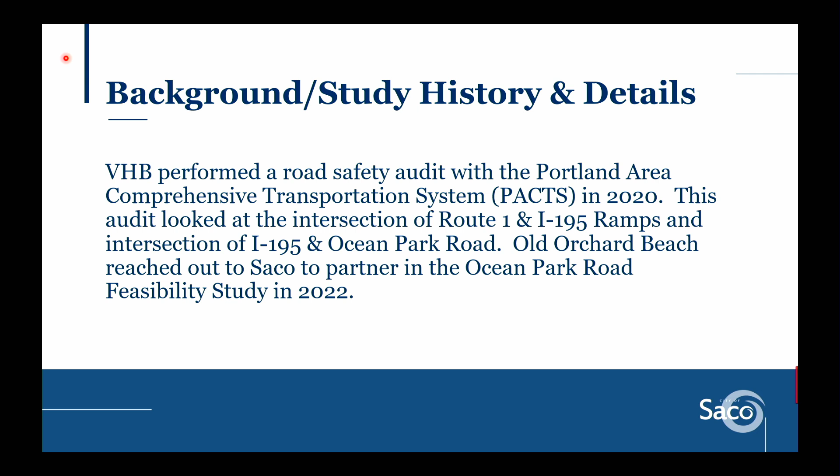The intersection of Exit 2A was identified as a high crash location by the Portland Area Comprehensive Transportation System, also known as PACTS. And that triggered a traffic study that was performed by VHB back in 2020. This audited the intersection of Exit 2A, Route 1, as well as the I-195 ramps and the I-195 Ocean Park Road. Old Orchard Beach reached out for Saco to partner with them as well as Maine DOT on the feasibility study in 2022.

So that study kicked off in September of 22. There were some initial concepts in April of 23. Traffic analysis was performed in October of 23. There were cost evaluations that were put together in the summer of 2024. There was a draft report that was released in September of 2024, and then there was a client meeting on October 7th of 2024. This was presented at the Old Orchard Beach Council meeting on November 19th, and the final report was released on November 27th of 2024.

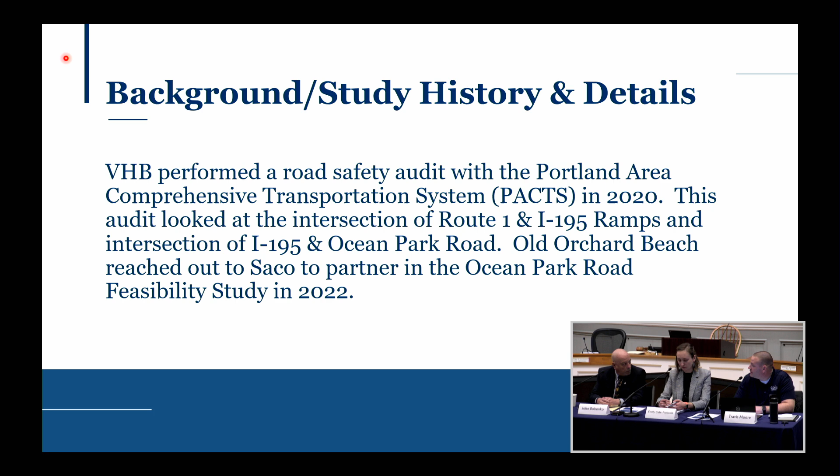And I'll hand it off to Emily. Thanks, Travis. So we just compiled what we've heard so far, and we appreciate the emails that have been sent in. So later when we ask for public comment, these are just a synopsis of some of the things that we've heard. It certainly doesn't capture everything. We'll take all your emails, all of the comments that you've submitted, and make sure those get captured and reflected accordingly, but we just want to summarize some of the things that we've seen so far.

There was discussion certainly at the January 13th City Council presentation where Gorrill Palmer presented to the City Council. There was a comment about roundabout design, eliminating or possibly reducing some carbon emissions, and to look at that. There was some interest from members of the public in learning more details about this study, so hopefully we can give you some of that this evening. There was concern about noise from I-195 needing to be addressed.

There was a question about attending the meeting and having someone attend on their behalf. So if you're in the room, you'll have an opportunity to share the comments of the person you're attending on behalf of. There were comments about Exit 2A considerations, about business considerations, and some additional need for public outreach. So we heard that, we're here tonight to talk with you folks. And then certainly safety considerations throughout the corridor.

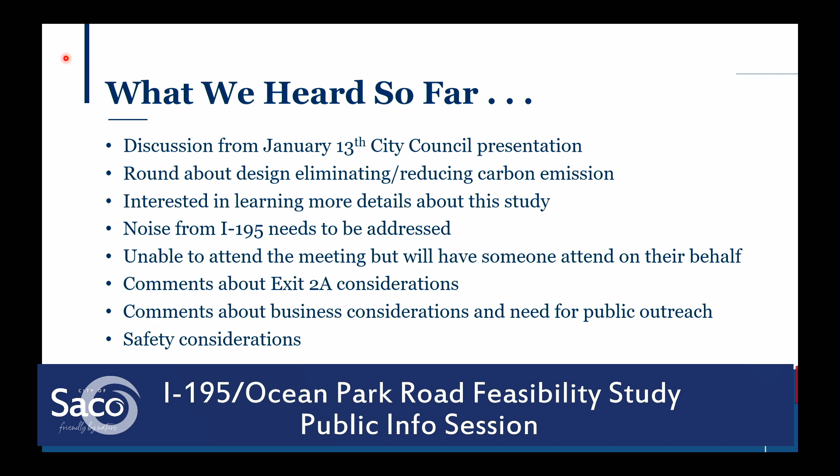And like I said, this is only a brief summary. We know we have more emails we received, some even today, so we'll make sure those get circulated and copies sent to the counselors. And for that, I'm going to go ahead and hand it off to Don Etchinger from Gorrill Palmer. He's going to go through the presentation and some study details for you.

Good evening, as mentioned, my name is Don Etchinger. You guys can hear me okay? Thumbs up in the back. Great. So here tonight, we're going to go through a presentation. We'll take questions and responses after we're through the presentation. For folks that were at the Saco Council meeting in January, the slides here will be very similar, but it's more for public content.

So first, I want to introduce our study team. This is a planning partnership initiative, a transportation study focused on transportation improvements. It's funded both at a state and local level. This project is somewhat unique because it's funded by 3 parties, 2 local parties. Our direct point of contact was the Town of Old Orchard Beach, but there was also funding from the City of Saco and Maine DOT. This slide provides our contacts for each of those client members.

In terms of the consultant team, Gorrill Palmer was the prime consultant on this project, but we were not alone. We had some sub-consultants helping out. North Star Planning assisted with land use planning and transit accommodations. James Tasse Consulting - Jim Tasse is pretty well known in the state for his bike and ped accommodations. And Acote Landscape Architects helped us out with landscaping, lighting, and also some of the renderings you'll see in tonight's presentation.

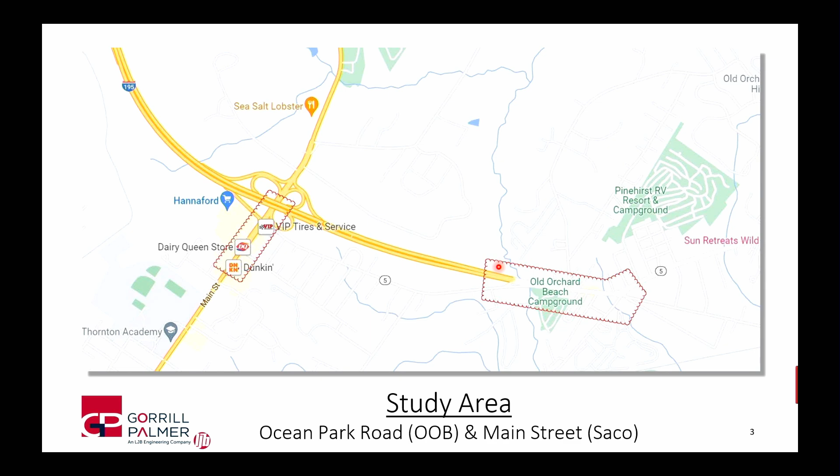This slide talks a little bit about the scope of the study - what are we looking for from a transportation perspective? One is traffic operations: how well does traffic operate through the corridor today, and can it be improved? We look at corridor safety and high crash locations, which we'll talk about tonight. Speeds were a big issue, particularly coming off the end of the spur into Old Orchard Beach, so we were looking to provide speed mitigation with this study. And then improving confusing geometry.

We had a variety of things to deal with, particularly on the end-of-spur corridor. Folks that travel through the Halfway Intersection by the 7-Eleven probably know it's quite confusing - it's a little mini roundabout, but very confusing. It's been a high crash location for years. But that's not the only issue we found through that corridor. There's also a major weave, particularly for campers coming off the spur that are turning into the Old Orchard Beach campground on the right before you get to Smith Wheel intersection, and traffic coming down Saco on Ocean Park Road that are weaving to turn left at the Smithwheel Road intersection where the Dunkin' Donuts is. So there was a major weave happening in a very short distance, also causing crashes and safety concerns.

This study was looking to address some of those issues. Access management - that is, driveway openings - reviewing those and trying to improve them for safety, not only for vehicles but also bicycles or pedestrians using that same corridor. Pedestrian and bicycle accommodations, as well as gateway opportunities entering both communities.

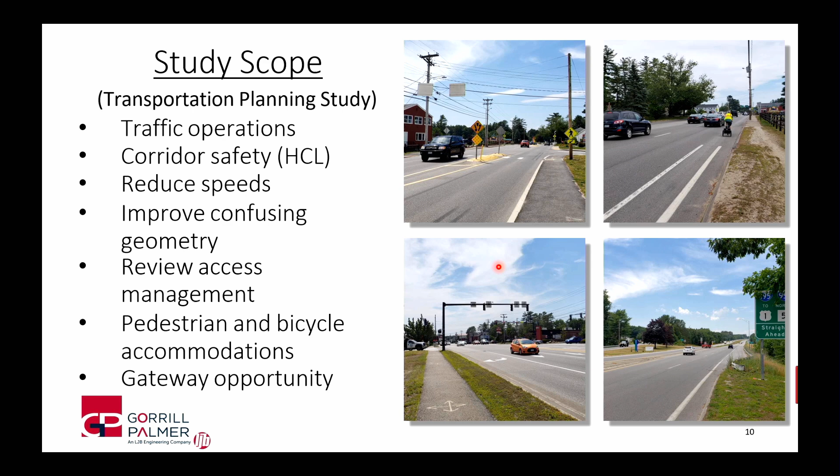Travis spoke to the slide a little bit, so I'm not going to go into great length here, but this slide provides a summary of our schedule. This project has been ongoing for the better part of 2 years. We had a kickoff meeting in the fall of 2022. We spent the bulk of 2023 into 2024 looking at traffic operations and safety improvements, and presented those in early 2024. From there, we had a series of options to consider, which we'll talk about tonight. We compared those options, came up with cost estimates and recommendations in the summer of last year, and presented our draft report and recommendations last fall.

After presenting the draft report to the Old Orchard Beach Council in November, we wrapped up this report in late November of last year. I would say over the course of the 2 years, this will be our 24th meeting on this project. 5 have been public or council related, and the rest have been study team meetings involving all 3 clients: Town of Old Orchard, Saco, and Maine DOT.

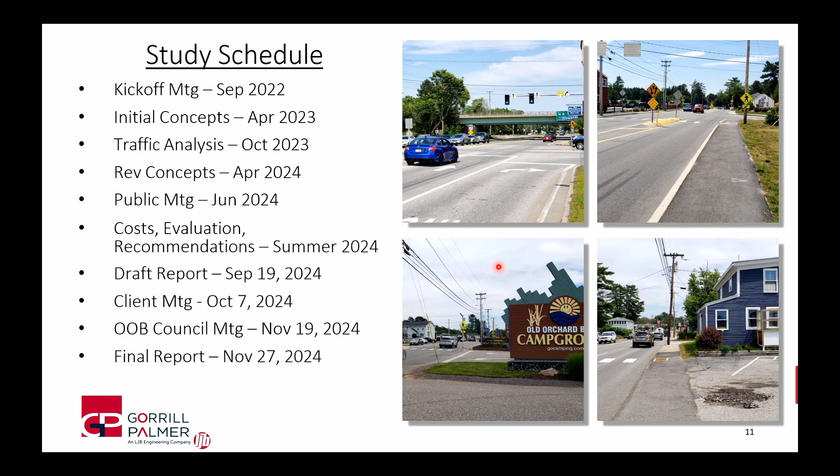So let's talk about the definition, what defines a high crash location. It's 8 or more crashes in a 3-year period and an intersection or roadway section that has a critical rate factor greater than 1.0. What is that? It's a mathematical calculation that Maine DOT goes through, comparing the types and severity of the accidents at this location to accidents across the state. So in order to be classified by Maine DOT as a high crash location, you need 8 or more crashes in a 3-year period and a CRF greater than 1.

Both off-ramps, exit 2A and 2B, in the eastbound direction where they merge with Route 1 are high crash locations. Traveling down into Old Orchard Beach, the halfway intersection that we mentioned earlier is also a high crash location, which I'm sure folks are not too surprised with. I think we have some diagrams of each of those.

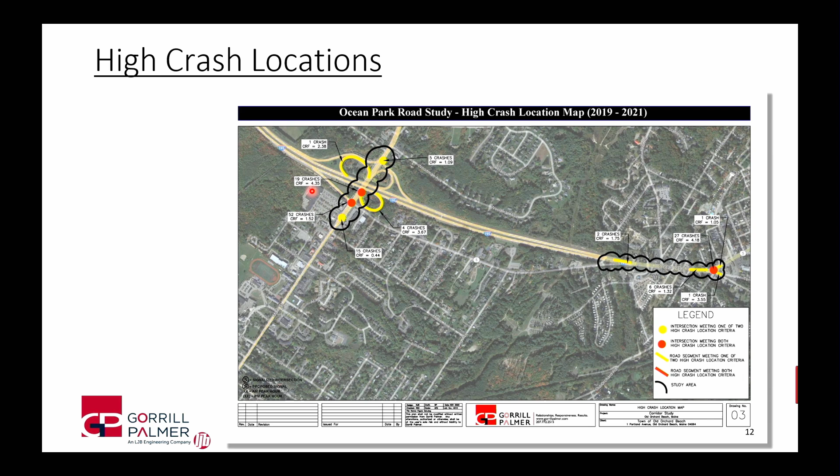So this intersection here, this is our crash diagram. The study period we looked at was when we started our study, so the trailing 3 years was 2019 through 2021, kind of during the COVID years. This is the exit 2A off-ramp where my cursor is. Across from it is Ocean Park Road. Where my cursor is now is Route 1 heading in the northbound direction, and Route 1 in the southbound direction. Hannaford is over where my cursor is now, and the VIP is on the opposite side.

So this intersection over the 3-year period from 2019 through 2021 had 52 crashes and a critical rate factor of 1.52. If you look at the crash patterns, you'll see that a lot of the crashes are reflective of the through traffic coming off the off-ramp from exit 2A onto Ocean Park Road. That movement happens at the same time as traffic coming up Ocean Park Road turning left, so they're concurrent movements. The folks coming up Ocean Park Road are supposed to yield to the traffic coming on the off-ramp. Unfortunately, there are a lot of accidents with that maneuver.

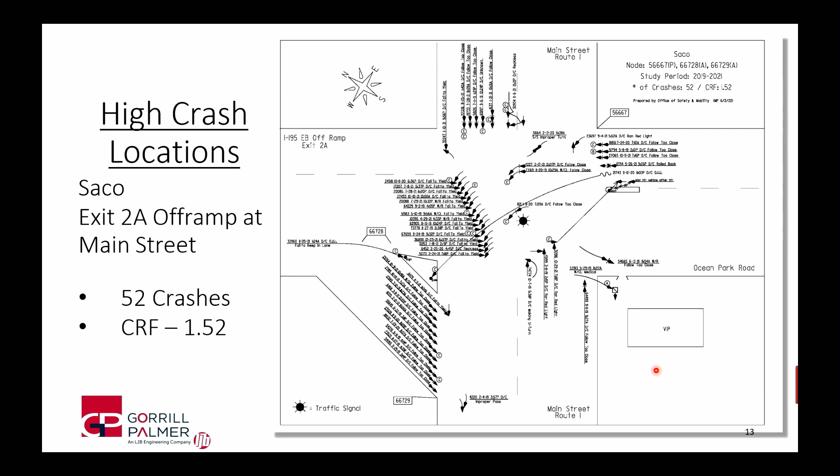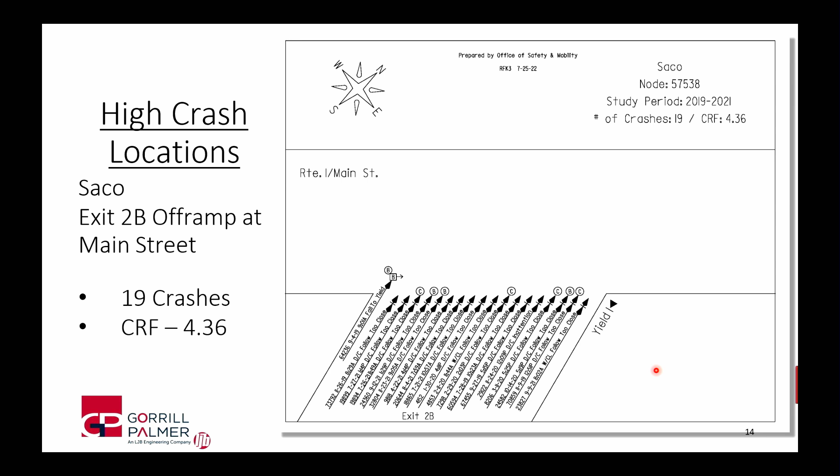The next intersection is the second off-ramp on Route 1 in Saco. This is the northbound off-ramp heading towards Funtown, Splashtown, coming from the Turnpike. It has 19 crashes in that same 3-year period and a critical rate factor of 4.36. A lot of these accidents are attributed to lack of sight lines, high speeds, and failure to yield to traffic on Route 1.

This is the third crash diagram, down in the town of Old Orchard Beach at the halfway intersection. To give folks their bearing, the 7-Eleven is over here, Ocean Park Road is on the opposite side, and then we have Old Orchard Road, Saco Ave, and Temple Ave. This intersection has 27 crashes and a critical rate factor of 4.18. So all 3 intersections qualify by Maine DOT as a high crash location.

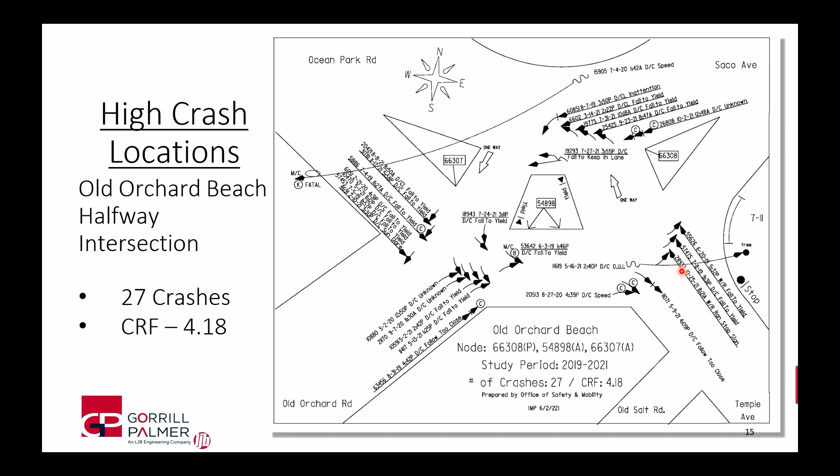So all 3 intersections were part of this study to look at mitigation measures to improve those. As Travis had mentioned in his opening slides, we actually didn't realize until we started the study that there was a prior safety audit done for the 2 off-ramps in Saco back in 2020, done by VHB, another consulting firm, where they looked at those high crash locations. They were identified as high crash locations, so they did a safety audit and came up with their own recommendations. We've carried those recommendations forward into this study.

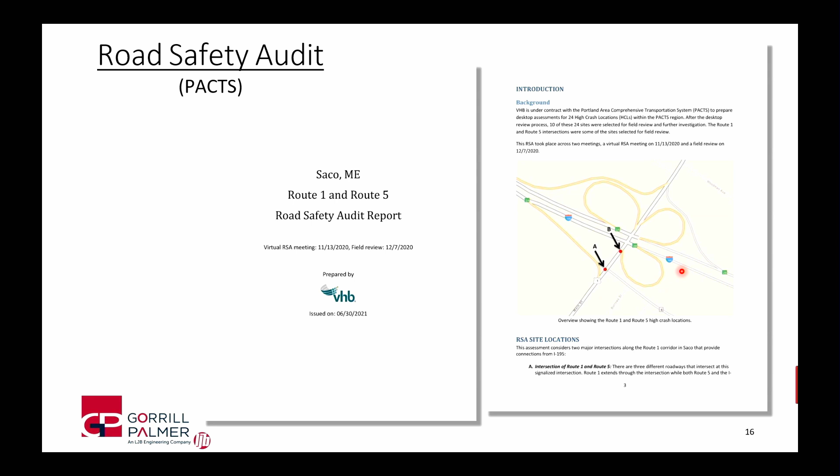The recommendations include closing the through movement of the exit 2A off-ramp that currently accesses Ocean Park Road, and not allowing that movement to happen. Instead, traffic would be sent down 195 to the far end of Ocean Park Road, which currently lacks full access—you can't turn right into it, nor turn left out of it onto the spur. We'll work in improvements so we can provide full access on the eastern end of Ocean Park Road in Saco.

Doing so allows us to close the southbound exit ramp at 2A through movement. That's the recommendation from the report presented to us, which we were asked to carry forward into this study.

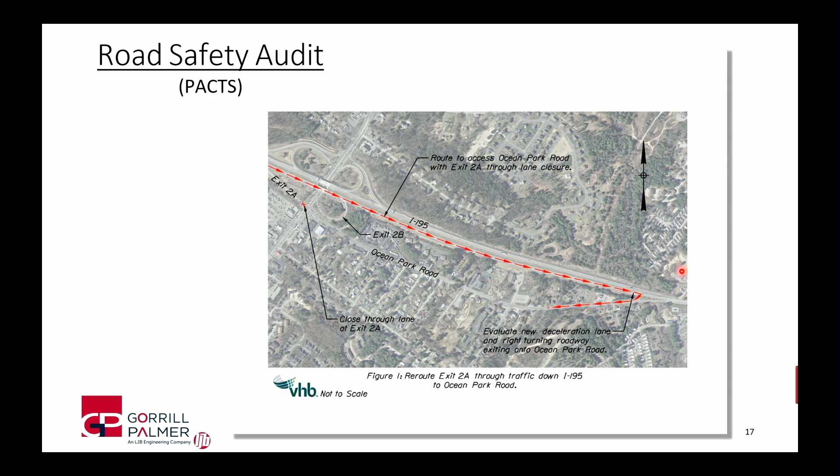So the next few slides will present the recommendations from this planning study, with graphics showing what was comprised in the report. We'll talk about concepts, costs, the evaluation matrix, and our final recommendations.

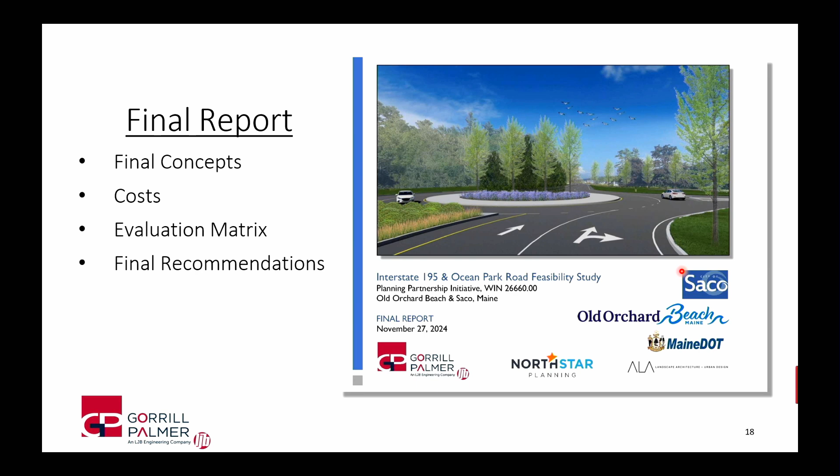As part of our recommendations, we're proposing to eliminate that through movement, which will eliminate the conflict between traffic coming off the off-ramp and traffic on Ocean Park Road trying to turn left. This should improve the safety and operations of that signalized intersection.

We're making the corner tie-in a little more abrupt and providing improvements to sight lines, along with clearing in that area so sight lines improve as you come off the off-ramp. The geometry will force drivers to slow down before merging with Route 1 traffic.

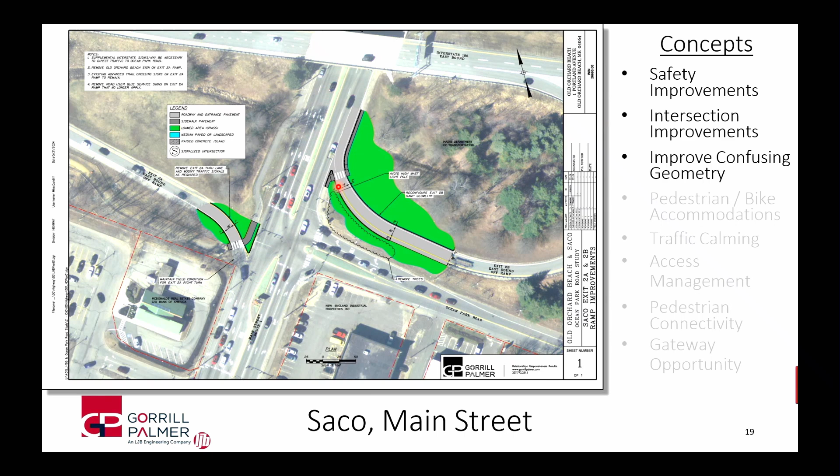The remainder of the slides discuss Interstate 195 as it transitions from an interstate to a more urban street in Old Orchard Beach. For folks driving the spur, as you come down it tapers from 2 lanes to 1 lane before merging into the urban environment and into Ocean Park Road from Saco.

We've found, based on input from the public and town officials, that speeds are still a problem even though it tapers from 2 lanes to 1 lane. Traffic is not slowing down coming into this urban area.

So a few recommendations are being made in this study. The first is to move the merge from 2 lanes to 1 lane further back, further to the west, by about 1,000 feet, tapering traffic sooner.

Basically, once drivers go over the interstate, which crosses over Main Street, Route 1, there's a long downhill slope. We're going to taper from 2 lanes to 1 about 1,000 feet sooner than today—about 3 football fields in length.

We're also going to introduce a roadway chicane—the technical term—basically some horizontal geometry to force vehicles to slow down before they approach the first intersection. This roadway chicane would be incorporated with any of the options studied for that first intersection.

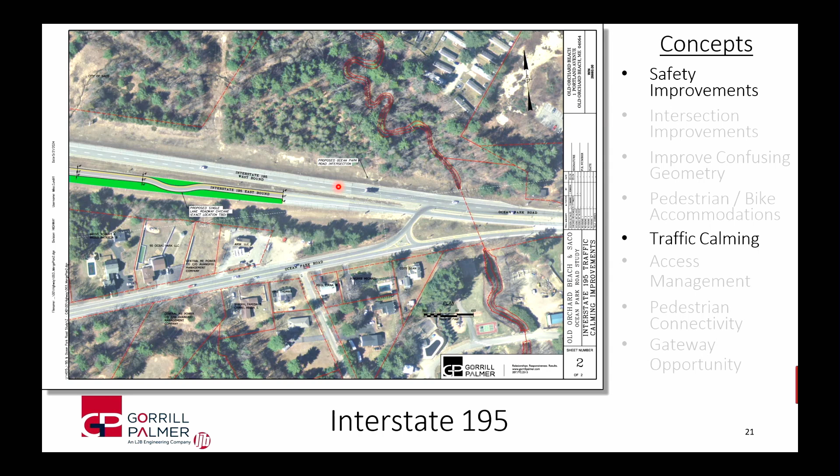The first intersection is the one coming off the spur. We looked at 3 different options there. Today it's an unsignalized intersection without full access, so some right turns and left turns are prohibited.

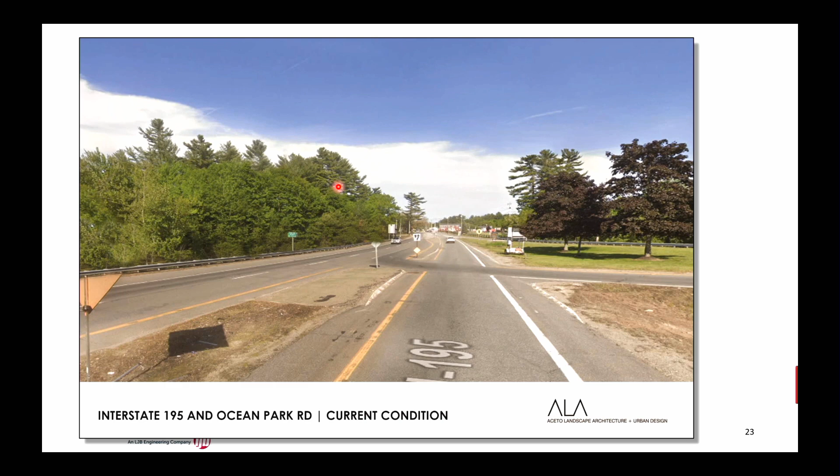So there's a lot going on in this corridor. Currently, the Smithwheel Road intersection is unsignalized. During the summertime, it's pretty challenging to get in and out of there because of the volume of traffic. And I had mentioned that the campground entrance was somewhat challenging too because it's very close to the end of the spur.

And so campers coming off the spur have to shift 1 or 2 lanes to get access to that campground. So a couple of things are being proposed here. One is we're proposing to signalize the Smithwheel Road intersection, which will improve the operations during the summertime for the side roads. The second thing we're proposing is to relocate that campground entrance, currently opposite Dunkin' Donuts, to be opposite Smithwheel.

So we'll create a four-way signalized intersection there. This provides more distance for that weave I mentioned, coming off the spur for traffic to get into their right lanes. The signal will provide better access in and out of Smithwheel and for the residents in that area.

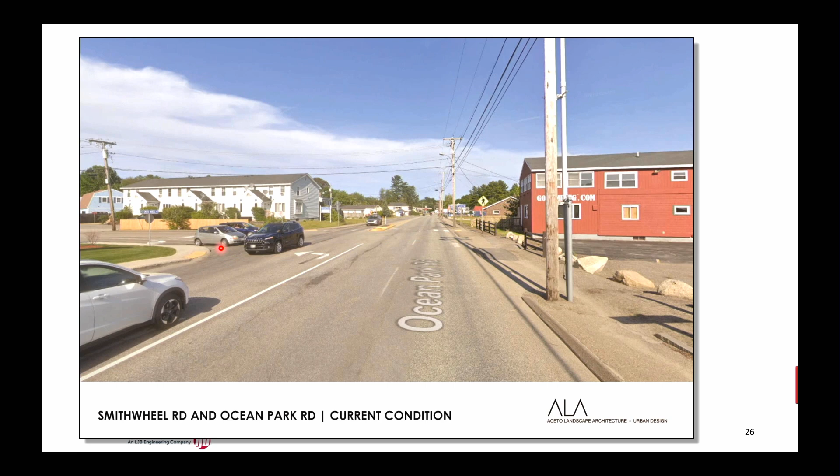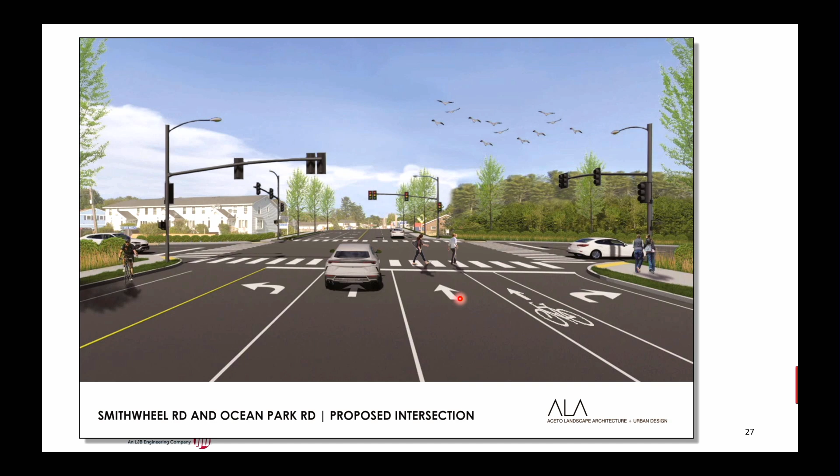All right, this is our third intersection - the halfway intersection where the 7-Eleven is located. We'd actually done a prior study, a planning partnership study with just the town of Old Orchard Beach 3, 4, or 5 years ago, that looked at just this intersection because it was a high crash location. We analyzed 5 or 6 different options.

We narrowed it down to either a roundabout or a signalized intersection, and carried those recommendations forward into this study. The conclusion of that prior study was that we really needed to look at the whole corridor, not just that intersection - that's why this second study came about. The recommendation out of this study is to signalize that intersection. We feel we'll have slightly less property impacts, and the operations of the corridor will be better with back-to-back signals at Smithwheel Road.

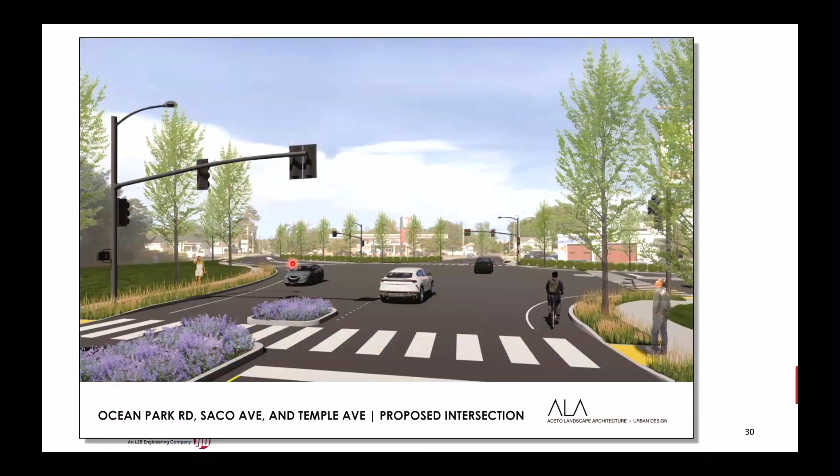All right, I'm going to jump back. We're going to talk briefly about Dewey Ave. This is a local street near that halfway intersection, located right here. I'll go back a couple of slides to show - Dewey Ave is located here. It's a dead-end street, servicing about 8 residential properties.

And with the proposal at this intersection, we're proposing a center median there, so we're restricting left turn access in and out of that dead-end street. So working with town officials, it was important that this study looked at some alternatives to access there, potentially providing secondary access, since we are restricting it with the intersection work.

So we looked at 4 different options for how to provide better connectivity to Dewey Ave. This was one of the 4 we came up with, where, shown in gray here, we're providing some secondary access through some of the other streets - Jeanette Ave, Oak Street. So basically we can provide a local street connection so that people can access Dewey Ave from other streets, just not from Ocean Park Road.

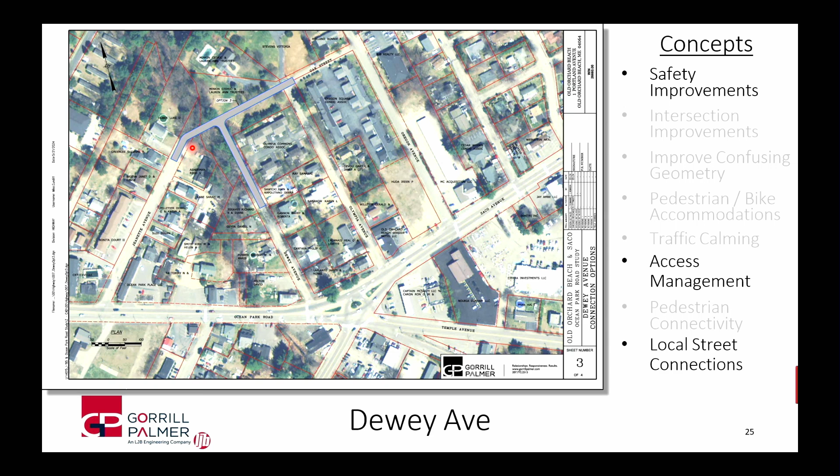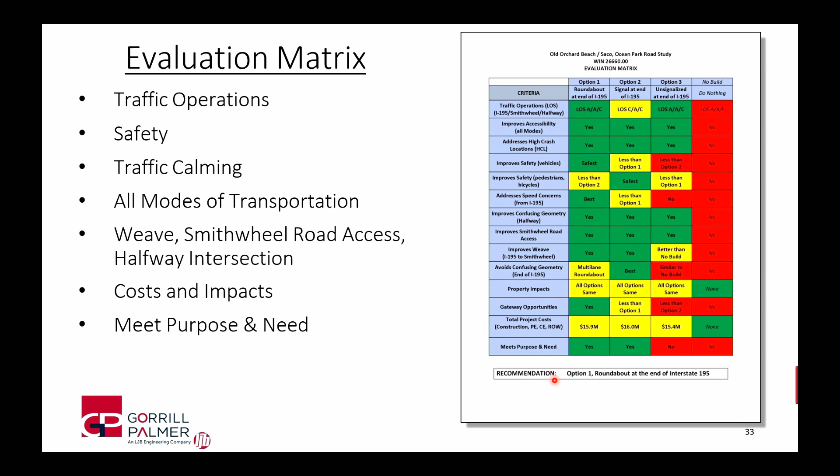This might be my last slide, so our final recommendations: we're recommending a roundabout at the end of the spur, a signalized intersection at the Smithwheel Road intersection, and a signalized intersection at the halfway intersection. We're also recommending geometric improvements at the two off-ramps in Saco on Main Street.

In the report, there's a whole page of additional comments, like making sure we design certain movements for certain size turning vehicles if it goes to a design phase. The state traffic engineer specifically asked about the roundabout design—when exiting Old Orchard Beach, could we have a dedicated lane separated from the roundabout by a median, so traffic doesn't have to engage with traffic in the roundabout. There will be some modifications to the recommendations in this report, but generally speaking it was supported through the process.

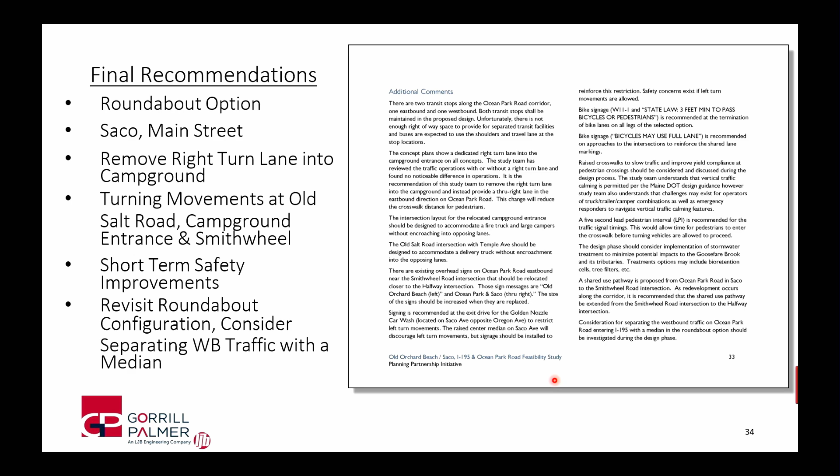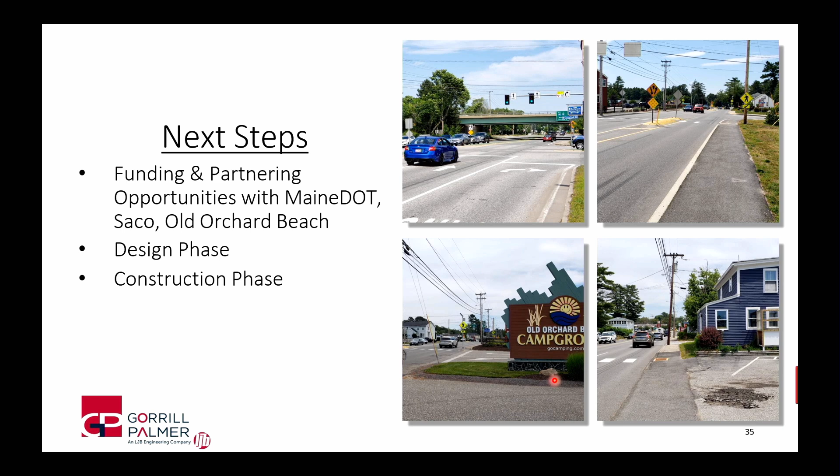In terms of next steps, where we are today is more information presenting, but if there's desire and interest, the next steps would be partnering with both communities and DOT, looking at funding opportunities, and how best to proceed forward with the project. Probably the next phase would be a design phase, then a construction phase. Design phase could take 2 to 3 years depending on funding, and construction, best guess, is probably a couple of years as well.

Thank you, Don. I want to point out that these studies take multiple years down the road from when the study is complete to what gets implemented on the ground, with additional time for public comment and design phase. We couldn't build something just on this study; it would have to go through a whole other engineering design phase. With that, I'd like to hand it off to Maine DOT.

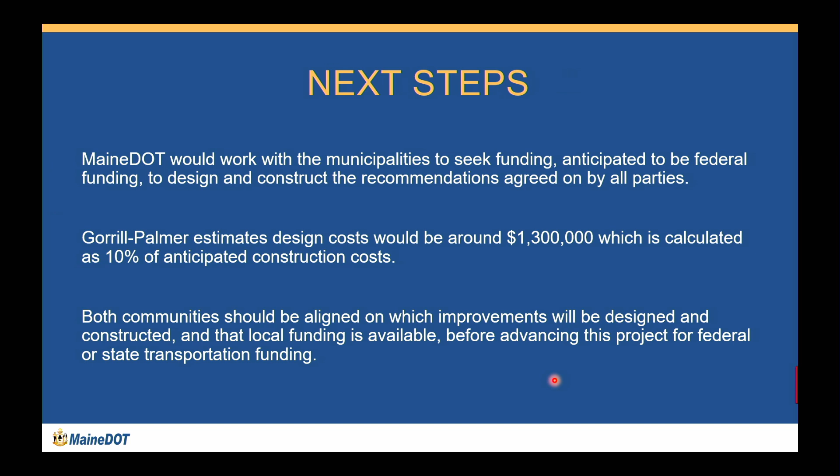Gorrill Palmer estimates design costs would be somewhere around $1.3 million or so, which is calculated as 10% of the anticipated construction costs for this project. And both communities should be aligned on which improvements would be designed and constructed, and that local funding is available before advancing this project for federal or state transportation funding.

So what I want to just make note of is that this is still in the study phase. This matter was presented to the City Council about a month ago, and out of that discussion came the request for this input session. It's important to understand the City Council has not signed on to any resolution yet. It's still evaluating its options. So tonight, it's important for us to understand and the City Council to understand what concerns you have.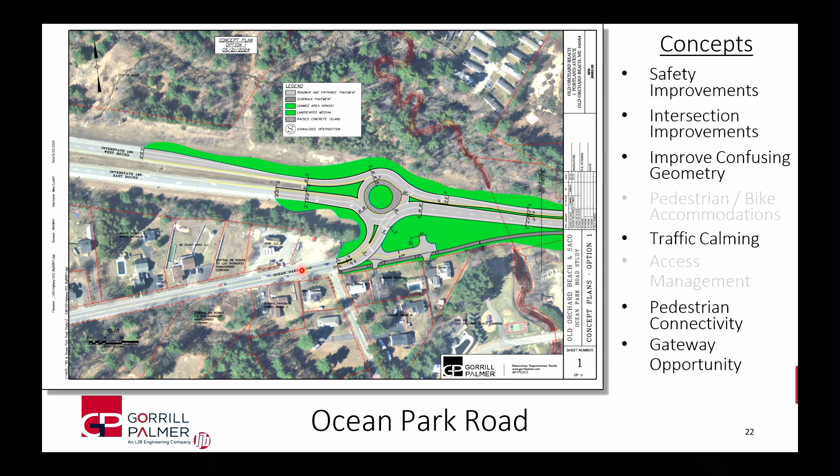All right, so this graphic here, you'll see this is the intersection where we're proposing the multi-use path coming back towards Saco. And then it continues along the old road alignment all the way here to where it ties into Ocean Park Road. Ocean Park Road has 8-foot paved shoulders, so we're kind of dropping it into that. There could be a future opportunity to continue that pathway all the way up to Main Street Route 1 if there was a desire, and that can connect you to the Eastern Trail.

In the opposite direction, our study recommendations include, as land gets redeveloped heading eastbound towards Old Orchard downtown, that this multi-use path, as these parcels get redeveloped, there's enough setback to allow that multi-use path to continue in that eastbound direction as well. So people from the campground trying to get towards the beach have that 10-foot wide trail.

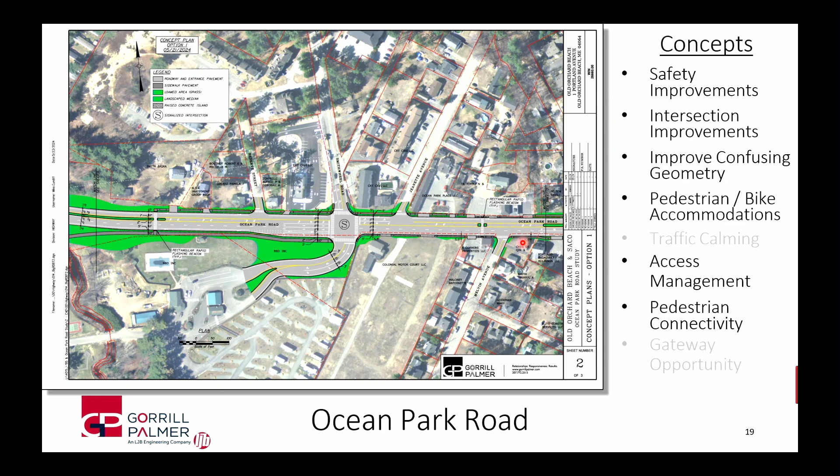Thank you, Don. Last point.

From a civilian perspective, it seems like the Ocean Park Road right-of-way is more than your minimum 50 feet wide. And the spur, the MDOT property, I'm not sure of the width of that right-of-way either. Very wide. The entire footprint of the roundabout fits well inside the available right-of-way owned by the state of Maine.

I've come to recognize over time that occasionally these generational opportunities come along, and for this project to not do everything it can to improve bicycle and pedestrian opportunities would be a wasted opportunity. Love everything I've seen up here. Long needed improvements, it's going to be great for motorists. I'm a motorist, I walk, I bike, and would love to see greater thought given to what else might be possible. When we get down to the list and pedestrian connectivity, bike ped accommodations are mentioned, bump it up the list a few spots and put a little more priority. I challenge you, MDOT, go for it.